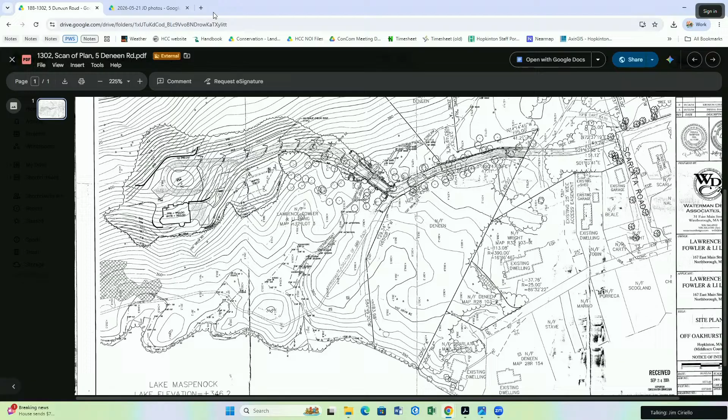Just offhand, I looked at the photo, I didn't count them up, to be fair. We didn't break them down like that, Jim, but it ranged probably from 1.5 inches to maybe 12 inches, the largest. Most of them were smaller, but there were quite a few larger stumps that we observed.

12 inches. Can I show some pictures also? I think we're just going to go with Judy's pictures and what we have in the file, because I don't have a way to identify where the trees are coming from, our jurisdiction versus outside of jurisdiction, other than Judy's photos.

And I'll just remind the commission, these are focused on trees that we definitively know are within the 100-foot buffer to the lake or the resource area. So this is probably a conservative count. It is a conservative count on trees. If we actually went out and surveyed them, there's likely more.

And the reason we need to assess the fines or not assess them tonight, as opposed to holding them, is because we have 21 days to act under that ticket system. When we used to hold in abeyance, it was before we had the ticketing system. When we had to move to a ticketing system, then we're locked into a 21-day window. You issue the ticket, and the violator has 21 days to pay it. We can go to the court and say we'll withdraw 40, we'll withdraw 30, whatever we want to do within that 21-day window. But once the days have passed, they're in violation of paying them.

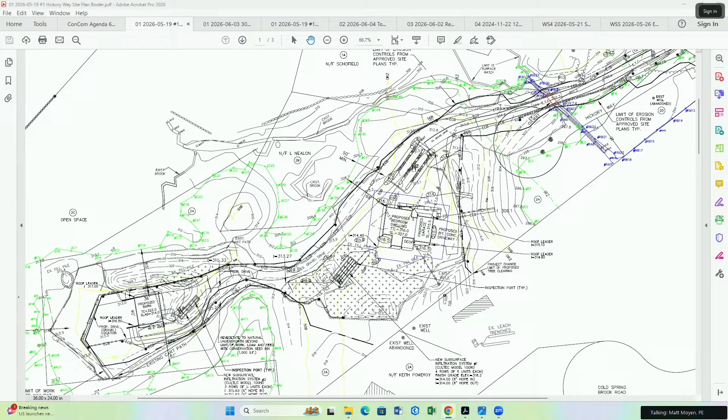So can I get a motion to continue this out to June 30th? So moved. Can I get a second? Second. All right, all in favor? Jim, aye. Ed, aye. Ted is an aye. Matt, aye. And I am also an aye.

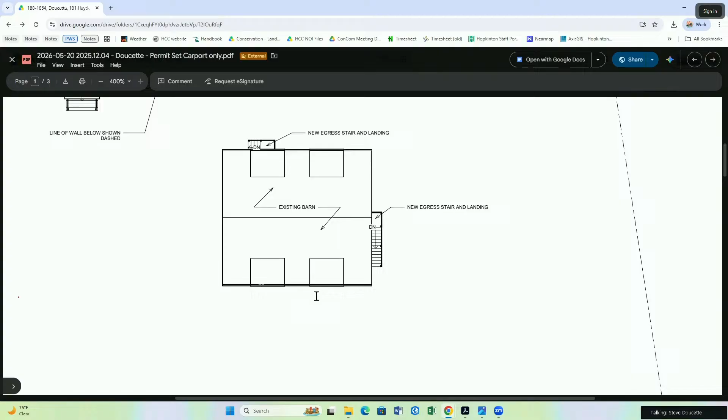So there's the existing barn. I guess that's coming from the back. If you see a side view, you can see where the doors want to go. If you scroll up, I think it may have a side door of the existing barn. No, maybe down. Yeah, go down, I think it's the last page. Steve, that's all the pages I got. All right, so go up to the top, because I think there's a picture of the barn on the first page.

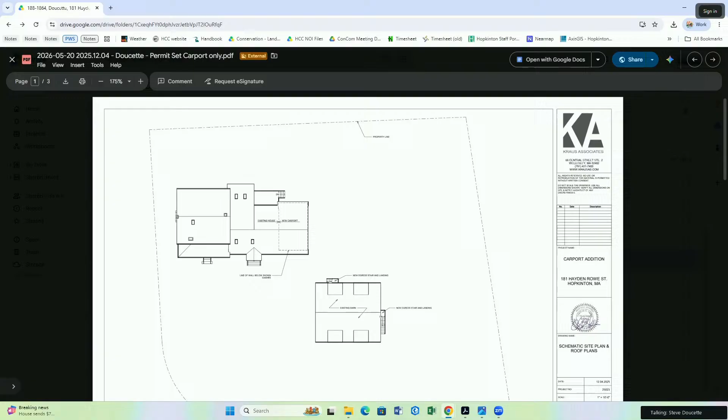Yeah, this is all I got, the 3 pages. And you only got 3 pages? Yeah. Well, okay. You can see if you look at that barn by itself, the egress stairs are coming down—those are 2 dormers that you're seeing there. The only place to access that whole back third of the barn is on that farthest right back corner. And the shed, again, was moved back just a little bit to allow me to get into that barn. Gotcha.

Okay, so I guess the question for the commission is, if we were okay with it at the last meeting, is it a minimal enough change?

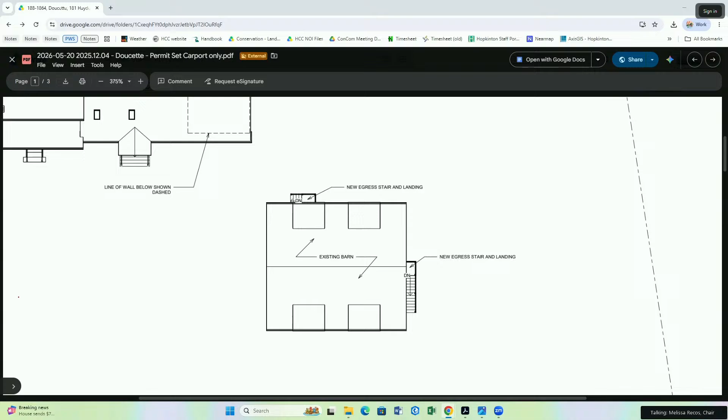The only thing that stuck out at me is when I looked back at the as-built plan from May 2025, it did not show gravel where the barn is right now. If you flip back to that plan, the gravel is even with the existing concrete line. So I think at some point between May 2025 and a couple months ago, there was gravel added. There was no gravel added — it was there because it always extended beyond the shed where it stood.

Yeah, this is the as-built plan from May 2025. What's CS in the back of that shed? Crushed stone. So if this as-built was correct, then at some point between May 2025 and the last couple months, there was additional crushed stone put in that area. I don't know what to say except that I moved that shed back 2 feet and it's right up against the crushed stone — there's none beyond it.

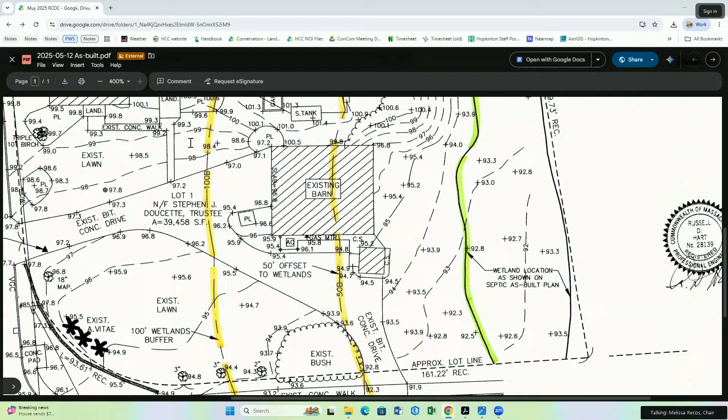My thought is, so that's one thing. Then we have the two trees that were taken down. Is there room to plant those 2 trees, or bushes or shrubs, behind the revised location of the shed to establish that? I thought we talked about these at the last meeting and agreed they're 2 plants right in front of the door, which is the back entrance to that barn, and I thought they were disposable. There was never any discussion of replacing them. If you'd like to replace them, I'm happy to accommodate, but I thought we had resolved that issue at our last meeting.

We did, but now I'm seeing a different issue here with the shed being closer to the wetland than it was when we previously approved a plan in 2025. So I'm seeing some encroachment. My recommendation to commission members, I'm open to other thoughts, is to plant a couple bushes behind the crushed gravel area of the revised existing shed location. It can stay where it is, but if we put some vegetation in there so we don't get any more creep, that would make me feel comfortable and ready to move on.

Through the chair, yes Ted. I'm with you, but maybe I'm misremembering this application versus others — I thought there was also a discussion that some of the land over there is really wet, and I wonder if bushes can be put there or if that area is too wet. But maybe I'm mixing it up with another application.

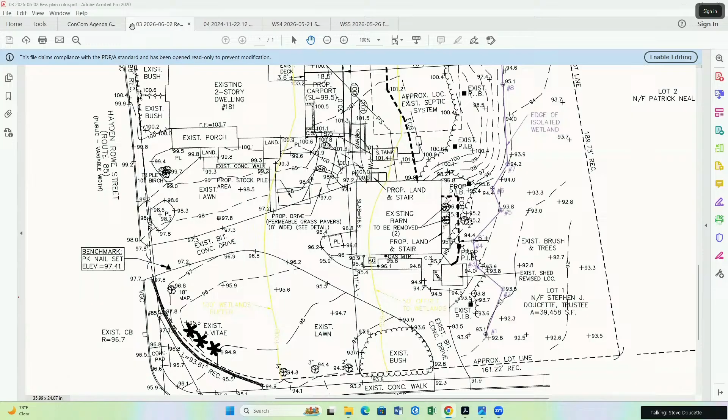Thank you very much. Yeah, thank you. You guys have a good evening. Hopefully you get out of here at a decent hour. You too.

Judy, I guess I will just get a letter of approval with conditions. Yep, within 21 days I'll have your permit to you with instructions on what to do. So does that hold up? So I can't start building or doing anything until I get that. Correct, yes, there are pre-construction conditions you'll have to follow, but once we issue, I'll follow up with you. We don't have to spend time on this now, but I'll follow up. Okay, and there's no way to accelerate that? I will do my best. Okay, thank you very much.

Have a good day, we'll see you later. Bye, good night, good night.

All right, next up we have Wall Street Development, 12 North Mill Street. Through the chair, yes Judy. We got a note from the applicant that they will be requesting a continuation to June 30th for this hearing.

Okay, can I get a motion then to continue this out to June 30th? So moved. Second. All right, all in favor? Jim, aye. Ed, aye. Ted, aye. Matt, aye. And I am also an aye. Excellent, okay.

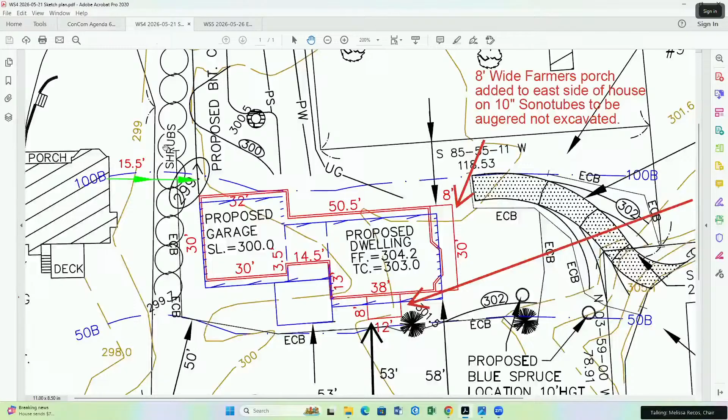Jumping down to work session items. 9 Montana Road, I believe, is up next. Project change requests. Judy, you want to give the rundown on this one?

Sure, through the chair. I believe we also have the applicant on the line, but just an overview: the commission issued an order of conditions back in 2022 for construction of a single-family house at 9 Montana. The approved location of the house is in blue. The applicant is now requesting a project change approval to shift the footprint of the house location to this area in red. So you've got wetlands here, so shifting away from the wetlands. They would also like to add an 8x12 deck off the back and a covered porch on the side here. I would note that adding a deck without a cover outside of the 50-foot buffer is considered an exempt activity.

So I think the commission would more want to focus on the addition of the covered porch, because that would be technically added impervious area. Back to you, Melissa. Okay, did the homeowner have anything they wanted to add to Judy's description there? No, I think she covered the actual proposed request. It's based on the customer's request for potential marketing of the project, so we're hoping that the concession of pushing the entire house forward, further away from the buffer zone, would offset some of the additional impervious coverage by the porch roof. So we're at least attempting to make things better at the same time we're asking for something in addition.

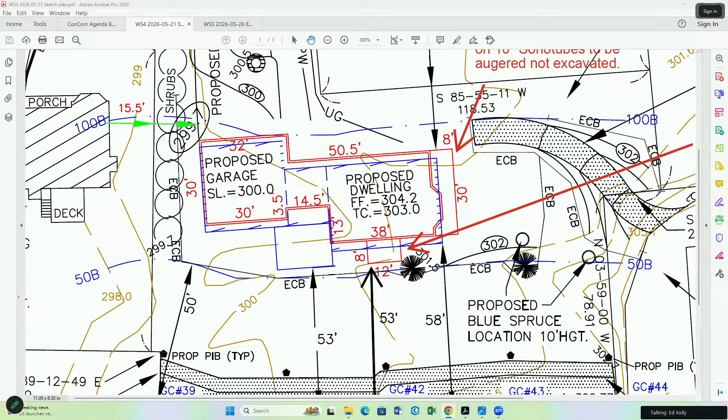Okay, next up we have the Trails at Legacy Farms request for additional units. And we have Mr. Bemis online, we haven't seen you in a while. Yes, good evening. Welcome back. It's good not to have to be seen for something other than this. That was a compliment, thank you. So good evening, Peter Bemis here on behalf of the Trails.

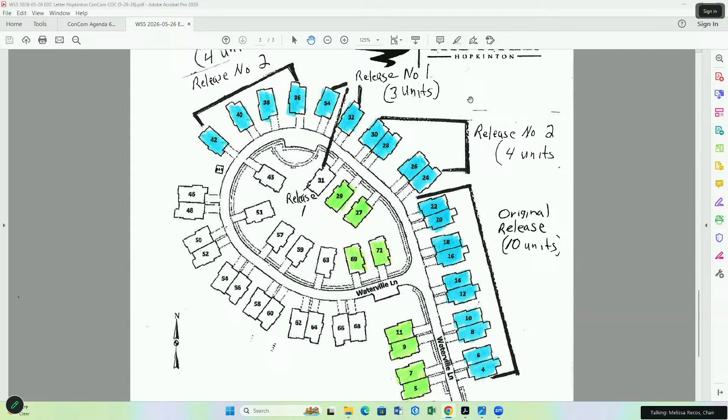Okay, next up, informal discussion, Davis, 1 Huckleberry Road vegetation clearing.

I guess I'll have you open this up, Judy. Sure, through the chair, let me pull up my pictures. Everybody was cutting trees a couple weeks ago.

We responded to another complaint regarding tree clearing in potential conservation jurisdiction on May 27th. I went out there and observed recently completed tree clearing in a potential buffer zone to wetland on the property at 1 Huckleberry Road, and potential buffer zone from wetlands documented across the street on Fruit Street. So I did issue a cease and desist for unpermitted vegetation removal that day, but I did grant administrative approval for 2 additional trees that were deemed hazardous on site with the homeowner.

There are, like I said, mapped wetlands across Fruit Street, and per notes from Kim, the previous conservation administrator, she did observe evidence of a potential wetland on this property. We just don't have mapping showing the extent of that.

The homeowner has been very cooperative and I believe is on the call with us today, so I'm happy to answer any questions. But the commission should discuss the nature of the violation and any next steps you would like to see.